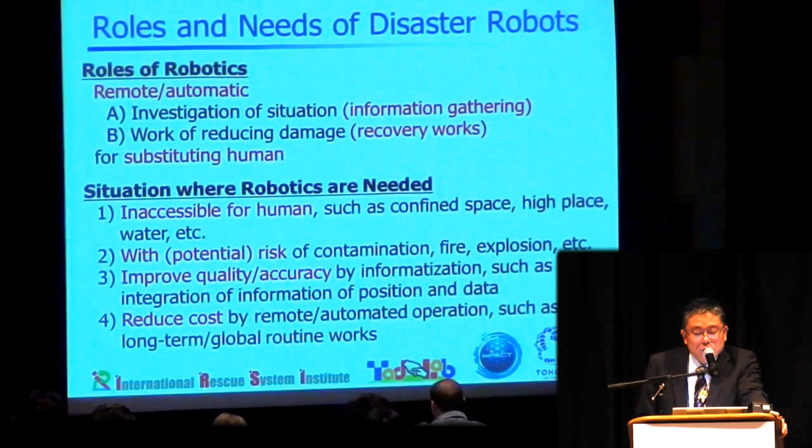So the purpose of the robotics is for information gathering and recovery works. This is a disaster cycle. After the breakout of the disaster, the response phase starts. It continues for a few days or weeks, and then the recovery phase starts, continuing for months or years.

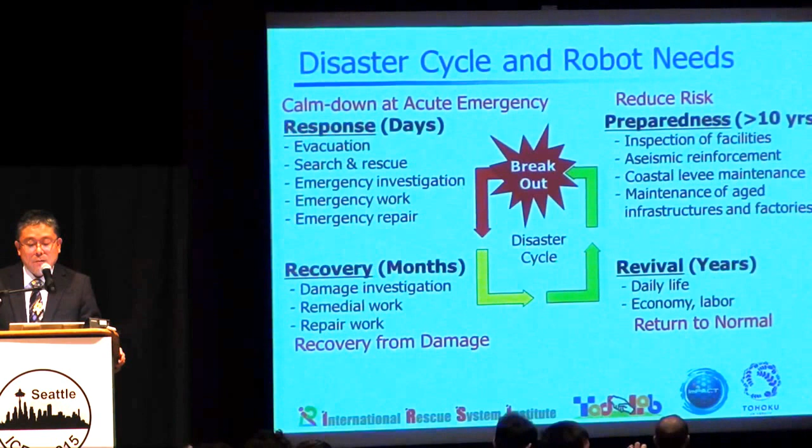But before that, the preparedness phase is really important. It continues more than 10 years. Sometimes we are focusing only on the response phase, but for disaster prevention or mitigation, preparedness and recovery are also very important issues. So we should consider how robotics can contribute to preparedness and recovery in addition to disaster response.

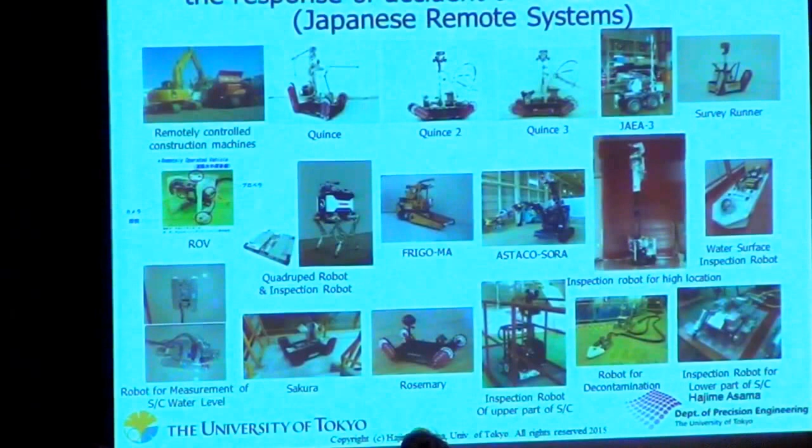The Fukushima Daiichi incident was really serious. After 3.11, several types of robots were used, and they were really effective for the decommissioning and also after the response. Our robot Quince was really successful.

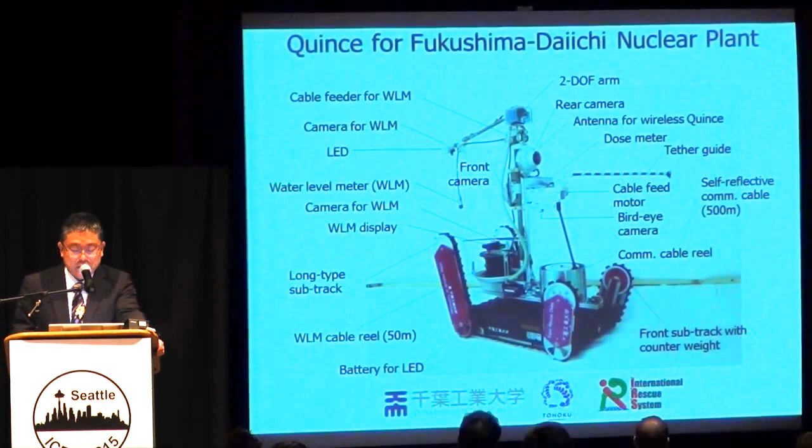It could survey the second floor of the nuclear power plant, and we could gather several pieces of information. It contributed significantly to the planning of the decommissioning and shutdown of the reactors.

However, this Quince was not intended for the nuclear power plant accident. The main purpose of developing this Quince was to respond to CBRN-type disasters which happen in underground cities.

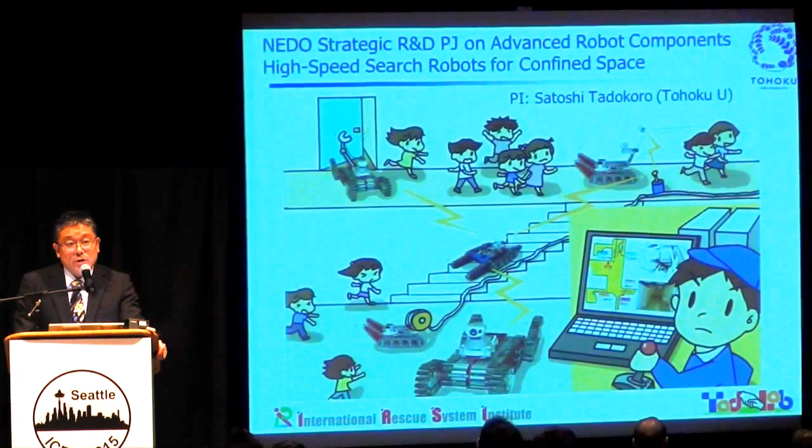In underground cities, firefighters suffered from chemical agents or something. In this case, the robot substitutes for the human and enters dangerous situations to gather information. That was the purpose why we developed it.

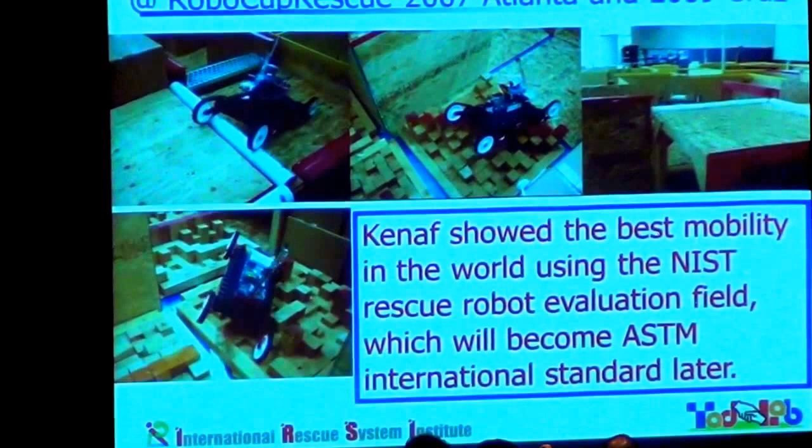The starting point of our disaster response robotics research was the earthquake disaster. We were really interested in rubble piles and rough situations, so mobility was really one of the top issues of our research and development.

This is a previous version of Quince called KENAF, and it was tested in several situations like this, or this was E-Defense, the world's largest shaking stage, which tests structures.

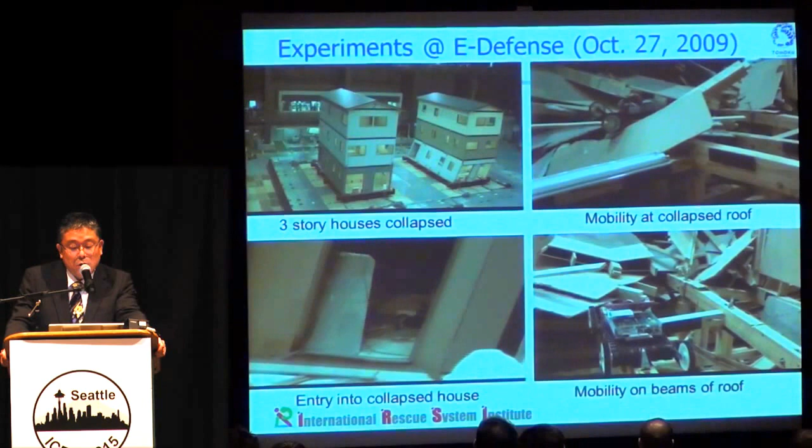This is a real 3-story house, and using this good opportunity of testing the robots, we collaborated with architects and also firefighters. We tested this KENAF in these situations.

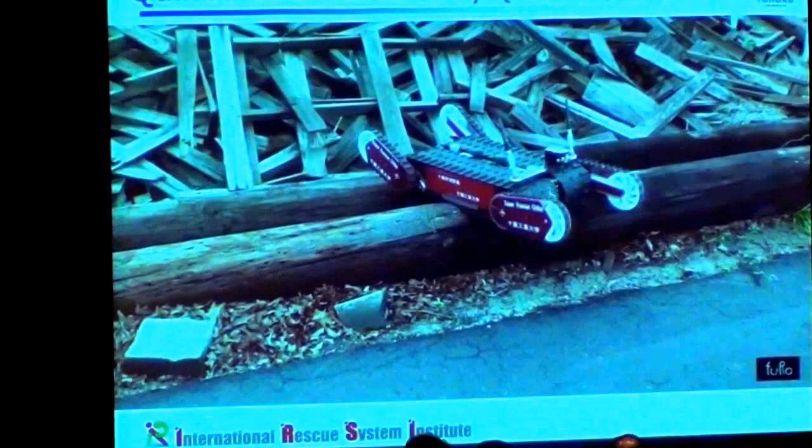Before 3.11, that was March 9th, 2011, two days before, we tested the Quince at Disaster City, and we were really happy that the Quince could be used in this really hard rubble pile.

This is a 40 meter by 40 meter size, huge rubble of wooden structures, and the Quince could traverse from one side to the other side successfully.

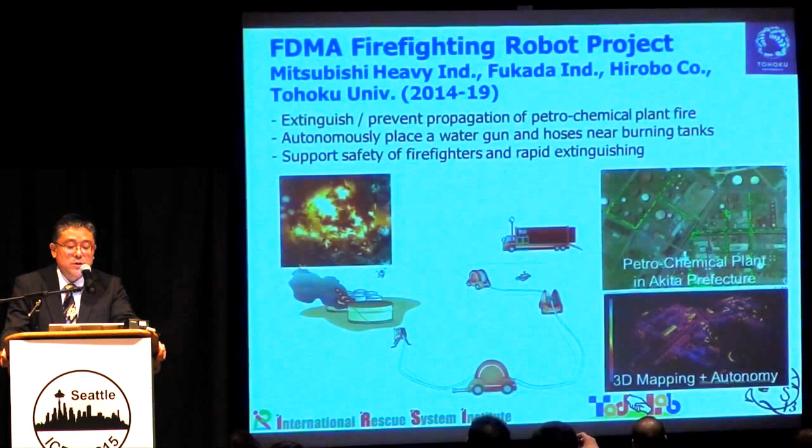We were really happy at that time, but after that, something happened in Japan, and we returned to Japan immediately. This technology was transferred to some companies. For example, the Japan government has a project with the Fire and Disaster Management Agency for a firefighting robot.

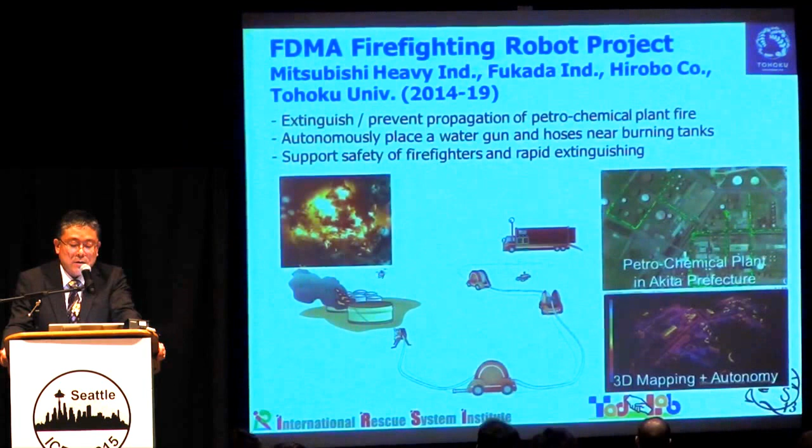In collaboration with Mitsubishi Heavy Industry, we are developing robotic systems for extinguishing and preventing propagation of petrochemical plant fire. The technology autonomously places a water gun and hoses near burning tanks. That is a result of the extension of the disaster response robot research.

We also developed an active scope camera. That is a thin, snake-type robot, whose purpose of development is search in rubble piles.

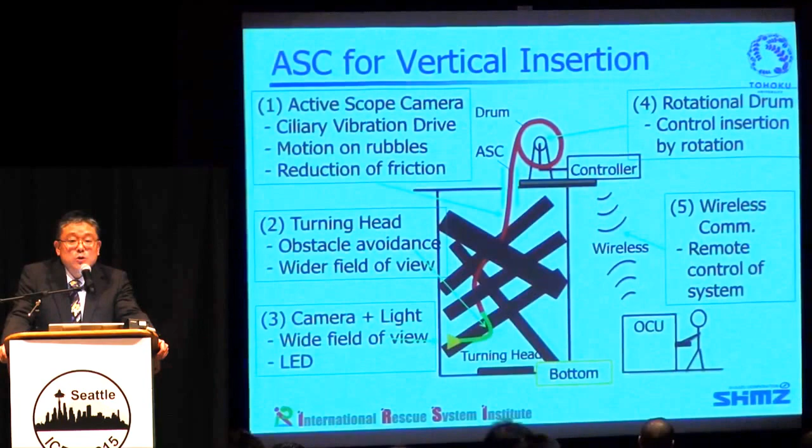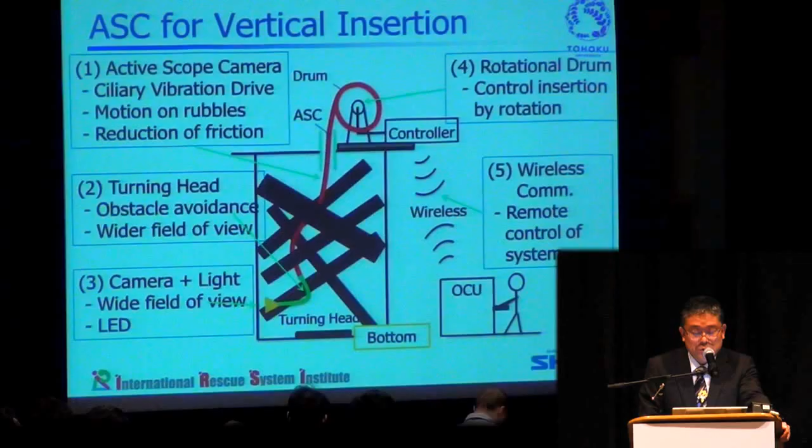After that, it was transferred to Shimizu Construction, a major construction company in Japan. Their mission was surveillance and information gathering in nuclear building number 1 in Fukushima Daiichi. It has a roof, and they made a hole in the roof, wanting to make a map and situation map of the rubble pile inside. So they collaborated with us to apply this active scope camera technology. They developed a crane system, and on the crane system this new type of active scope camera was installed, planned to be used in the actual plant.

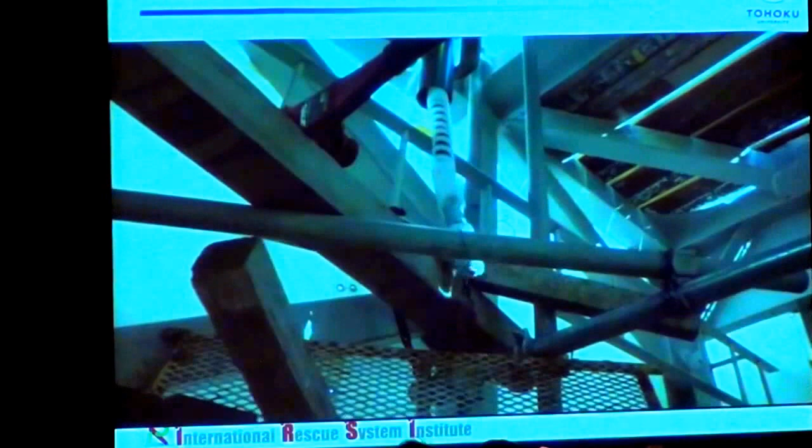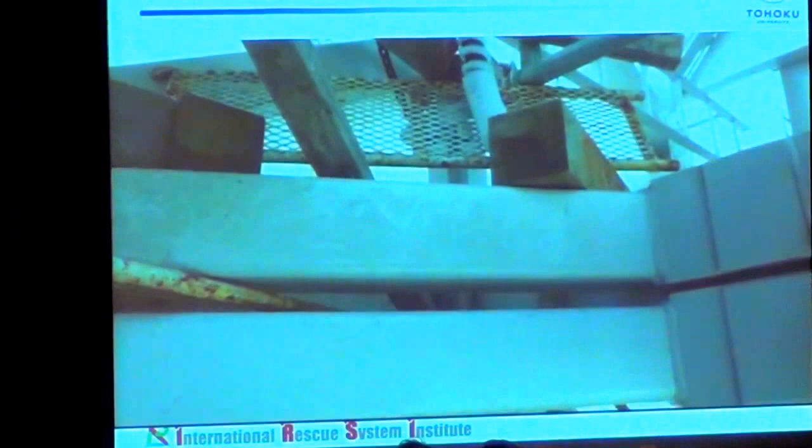This is the experimental result of the active scope camera, and it successfully entered these situations. It simulated the inside of the nuclear reactor building, and it could survey and make a map of the inside of the rubble pile.

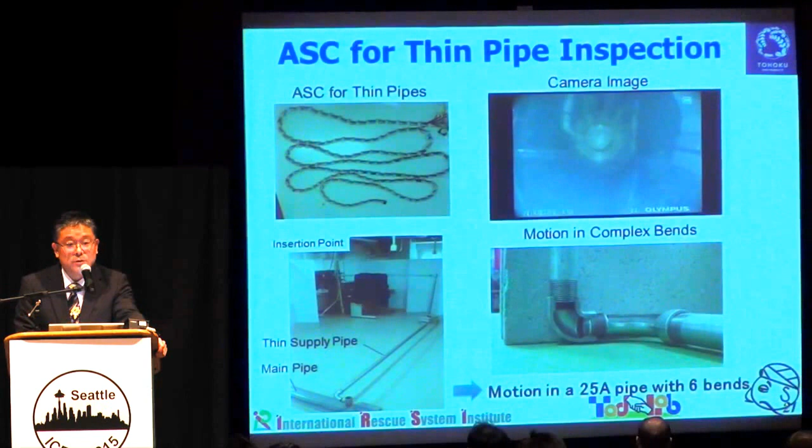This technology was also transferred to gas companies who wanted to inspect the thin pipes connecting the main big pipe with houses. The diameter is up to 1 inch, so it is really thin. This active scope camera was revealed to be really effective for this purpose. We could capture images in the 1 inch pipe with 6 bends successfully. According to them, that is much beyond existing technologies.

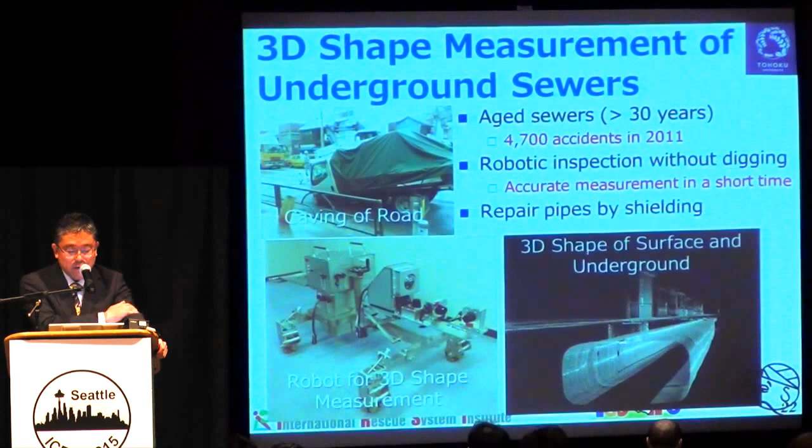This is a similar application for 3D shape measurement of underground sewers. Japan has so many aged sewers, more than 30 years old, and it is a really big social problem. So we applied our mapping technologies to these issues, and it was really successful for producing a product for underground sewer measurement.

Therefore, it is impossible for this UAV to make a map of big buildings by itself. However, the UGV can survive for a long time. On the other hand, the UGV has a problem in that it cannot enter narrow spaces. So the collaboration of the two robots was really effective, and as a result of this experiment, we could make a map of the whole building from the 4th floor to the 8th floor.

It was actually a damaged building, the Tohoku University electrical department building, and it was really successful. But it was not the actual mission, it was an experiment there.

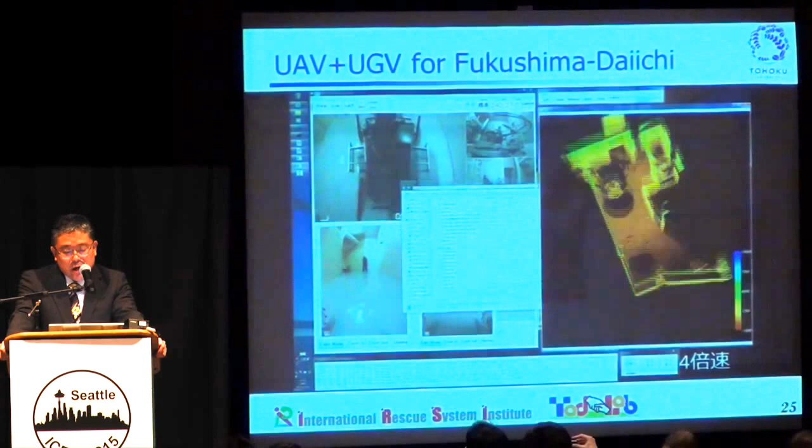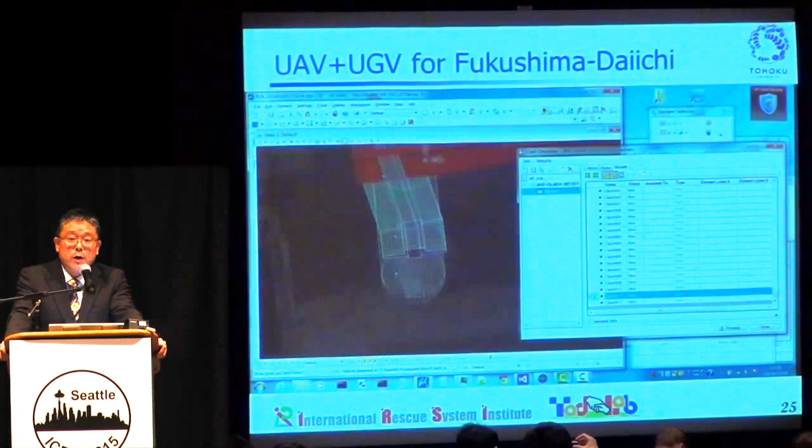This technology was transferred to the really planned missions for Fukushima Daiichi. TEPCO, Tokyo Electric Power Company, wanted to make a map of the buildings, since there remain places where neither robots nor humans can enter. So using the UAV and UGV together, they wanted to make the map. This is a picture of the testing, and we could successfully make a map, but the reliability was not sufficient, so we're waiting for the actual mission.

And this is another application of UAVs. Two years ago, a new student came to my laboratory, and he proposed development of a ball-type UAV. He was motivated by an invention by Japan's Self-Defense Force, who developed a ball-type UAV. So his proposal was to apply a gimbal structure for the UAV. We made a discussion, and he started the development.

In the summer, he was really successful in developing this creature. However, after that, I attended IROS and found a really similar invention presented by EPFL people, also a gimbal type. The difference was their gimbal has only one rotor, but ours has four rotors. Apparently the EPFL people were first, and we were second.

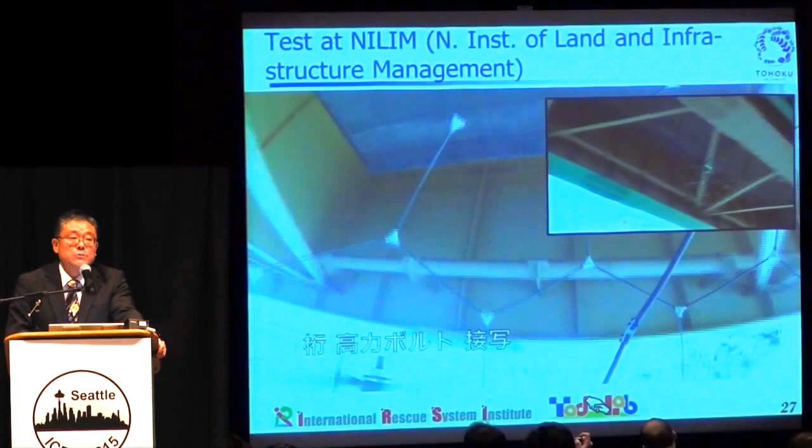By using GPS, IMU, and camera, and so on, we can monitor the behavior of this rescue dog. This is one of the results - it could measure the motion of the dog and capture the dog's behavior, and operators could know why the dog is barking. And this picture shows what the dog found.

So those are some introductions of the research of our group. And apparently, I think science and technology are becoming ready for real disaster missions.

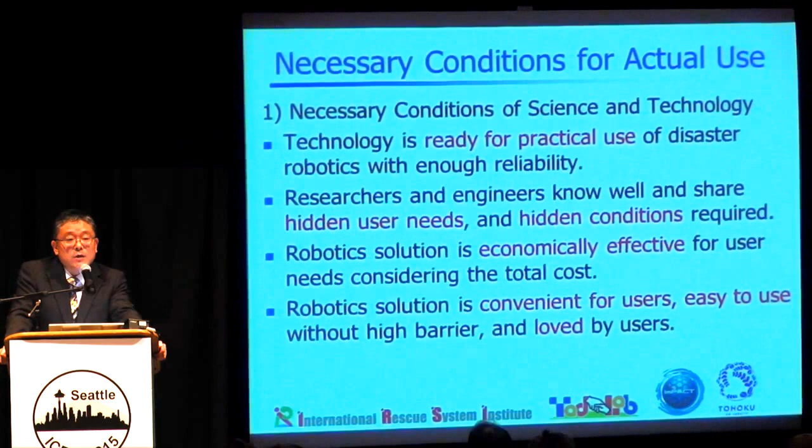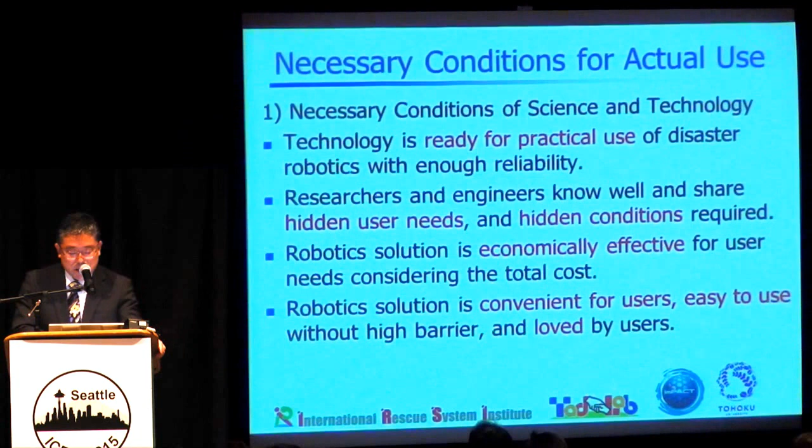And also, robotic solutions should be economically effective - that means the robots should be cheap enough, and that is really important for actual use. And also, robotic solutions should be convenient for users, easy to use, and that is also very important.

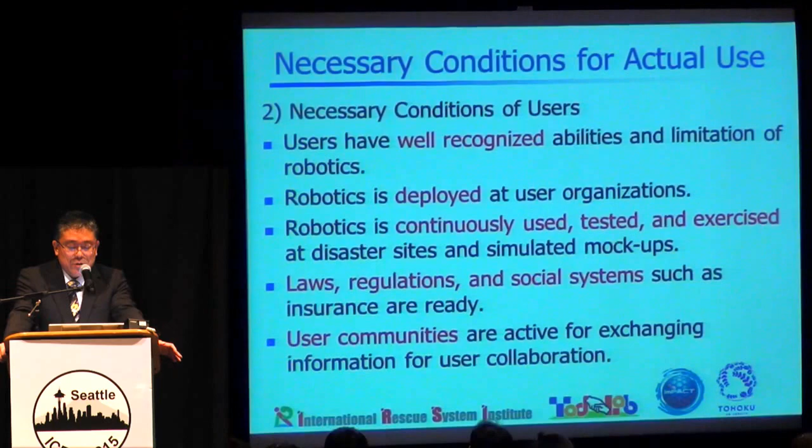In addition, there are several necessary conditions of users. Users should have well-recognized ability and limitation of robotics - that is necessary, and robotics should be deployed and continuously used, tested, and exercised by users. That is very important. For that purpose, law, regulation, and social systems should be appropriate for this purpose. And also the user communities are really important. Is this academic work? No, totally not. But in this domain, we should consider this carefully if we want our robotics to be used.

And the third part is necessary conditions of industries. Robotics business and investment should be successful, and systems of distribution, maintenance, user education, and so on should be set up, and human resources should be enough, and international markets and standards should be ready. Those are really important things.

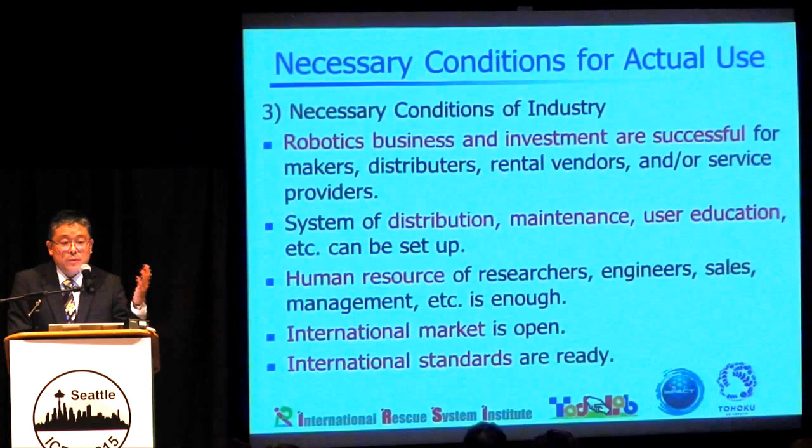However, I am in academia, and many people are not working on setting up these conditions. So in order to lower the social barriers, we have to do something.

The IEEE Robotics and Automation Society organized a public forum at the United Nations World Conference on Disaster Risk Reduction, held this March in Sendai. At that event, we announced a voluntary commitment during a working session in the main conference.

This is the structure of the United Nations, with several offices. Among these, two are really related to disasters: UNISDR, the United Nations International Strategy for Disaster Reduction, focusing on preparedness, and OCHA, the Office for the Coordination of Humanitarian Affairs, which focuses on emergency response.

This World Conference is the main conference of UNISDR. Ten years ago, this conference was held in Kobe, and they adopted the Hyogo Framework for Action, HFA, which defined the necessary actions for 2005 to 2015, a 10-year period. It had a major impact on national disaster prevention policies for those 10 years.

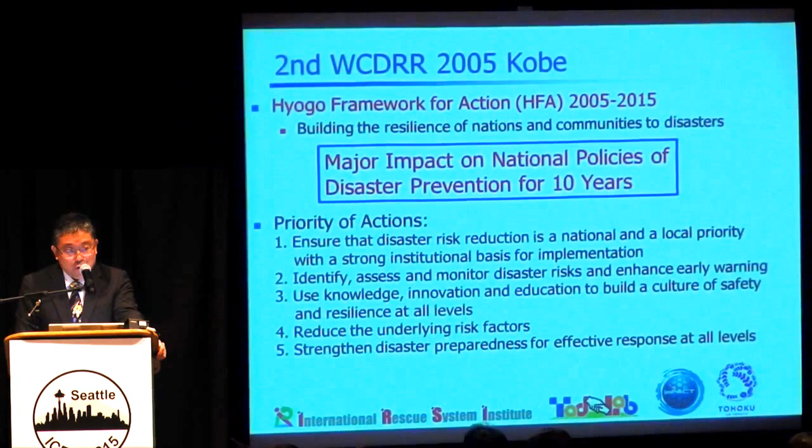However, this HFA didn't include any mention of robotics. So I wanted to have this keyword, robotics, in the next framework, announced in Sendai. They adopted the Sendai Framework for Disaster Risk Reduction, planned for 15 years. But our action, the RAS action, was too late, and it was not possible to include robotics.

But it was really happy, because the disaster managers and United Nations people recognized how robotics is effective for disaster prevention in the future. That was a really nice achievement.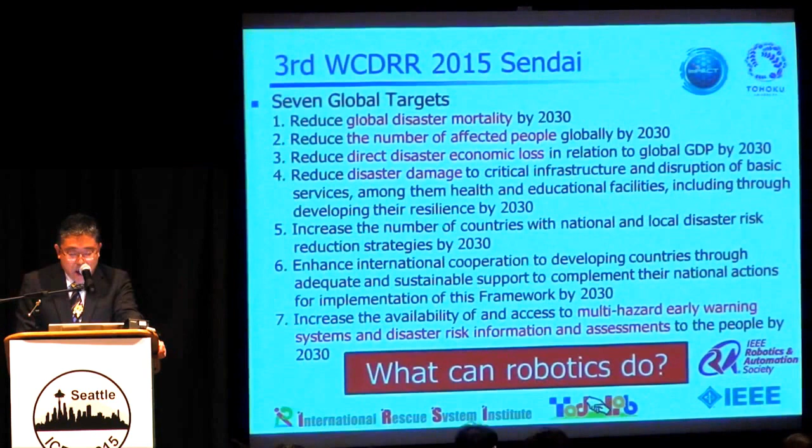The question from the United Nations was: what can robotics do? So we made a statement that an international committee shall be established as a way to accelerate the implementation of robotics and ICT for national disaster management plans and national regulations, synchronized with rapid technology revolutions. This national disaster management plan apparently includes, for example, budget raising in the government.

IEEE has SIGHT, which is the IEEE Special Interest Group on Humanitarian Technology. It was established after the 3.11 incident, and they are working on several things including disasters. According to the call from IEEE, the Robotics and Automation Society established the RAS Special Interest Group on Humanitarian Technology, RAS SIGHT. So the mission is as follows.

So what is the international committee referenced in this declaration at the United Nations? I plan to establish a subcommittee in RAS SIGHT for that UN voluntary commitment. So what is the mission of the International Committee?

I don't know exactly what the final mission is. However, at least it includes the kickoff of action and collaboration of stakeholders for the social implementation of disaster robotics. It should provide a forum for discussion, and it should match social needs and technology seeds, bridging the gap. That is really important action from RAS, not only about technology, but also industry and social things.